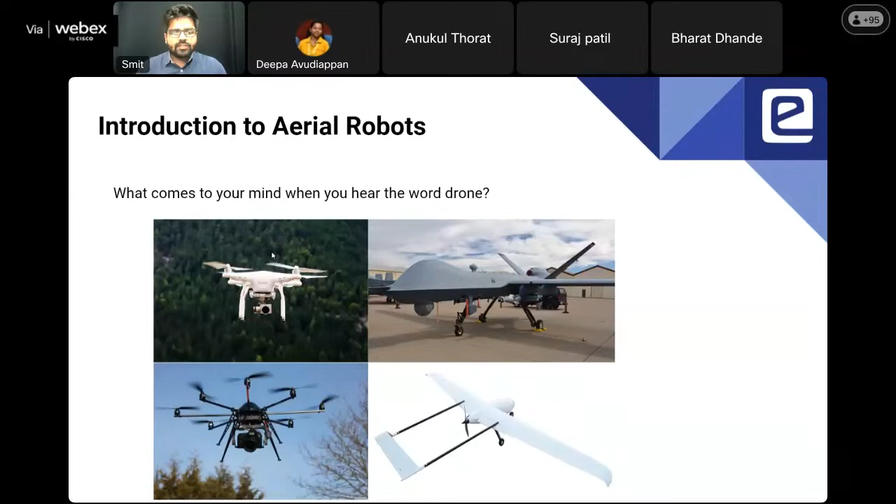Third is not so commonly available picture in your mind when the drone comes, but still some of you might think of this as a drone. But this thing, does anyone think of this when the word drone comes to your mind? No, right? But let me tell you, this also is a drone. So in general, how can we define the word drone? Drone is a pilotless aircraft directed by remote control or nowadays even autonomous. So if you don't have a pilot and it's flying by itself, by a remote or autonomously, it's called a drone.

It might be a ground vehicle, aerial vehicle, or underwater vehicle also. But usually we denote the term drone with aircrafts. So the words drone, aerial robot, aircraft, multi-rotor, quadcopter will be used interchangeably throughout the session, and you can also use those terms. Since we saw these very diverse images of drones, let's classify aerial robots into some brief categories. The first one is the class of multi-rotors.

Now the question is, what is a multi-rotor? If you break the two words, multi and rotors, there are multiple rotors, more than one. They look something like this. Then we have winged aircrafts or aerial robots, which have fixed wings. The difference is, these propellers that you see are also wings, but they rotate at a particular RPM to generate the lift or the thrust.

But here, these wings do not rotate. They are fixed wings. And since they glide in the air with high speeds, they produce lift or thrust. So fixed wings and rotary wings. First is multi-rotors, where you have multiple rotor bodies generating thrust. And the second image that we see is a fixed wing aircraft.

There are some also, if you combine both of them, there's something called a hybrid class of aerial robots, where you have fixed wing as well as a combination of rotary wings. So you can have 3, you can have 2, you can have 4, or even more, as well as fixed wings. So you have advantages and features of both the classes of aerial robots.

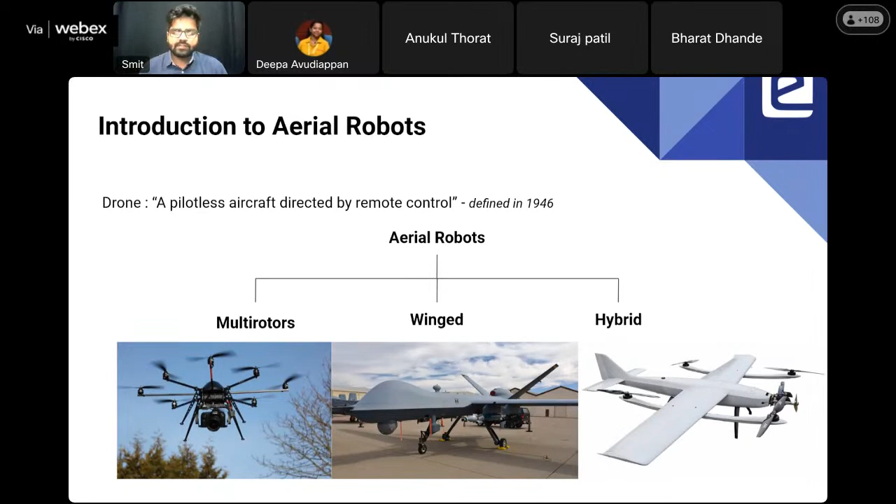So this is how I classify aerial robots briefly. There are multi-rotors, there are winged ones, and then there are hybrid ones. So let's see about the specific class multi-rotors and classify them more in depth. Let's classify them on the basis of the number of rotors that they have. So as we defined, multi-rotors are nothing but a rotorcraft with more than 2 lifting rotors. Out of that, you can have different numbers of rotors, right?

So the first one that is most commonly seen around us is quadcopters. Now, as the name suggests, quad means there are 4 motors, and copters again is a word for a rotating body. So quadcopters, as the name suggests, have four rotors generating lift or thrust, and then there are hexacopters.

Hexa means 6, so I think nothing new. 6 copters, 6 rotors. There can be more. There can be octocopters. This particular aircraft has eight of them, and also you can reduce the numbers and go to bicopters or tricopters. So in bi we have 2, tri we have 3.

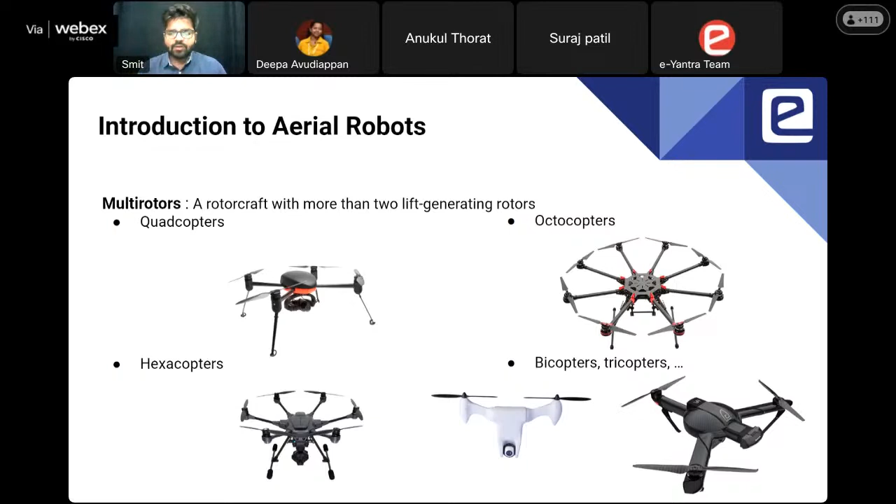So now the question is, why so many variations? Why so many differences? If you can achieve it with, let's say, 4 rotors, why do you want to go to 6? Why do you want to go to 8? Or even go below, having 2 or 3. So the answer is basic. It's just simplicity and the level of complexity involved in all the aspects, in manufacturing, in making, in controls, in software.

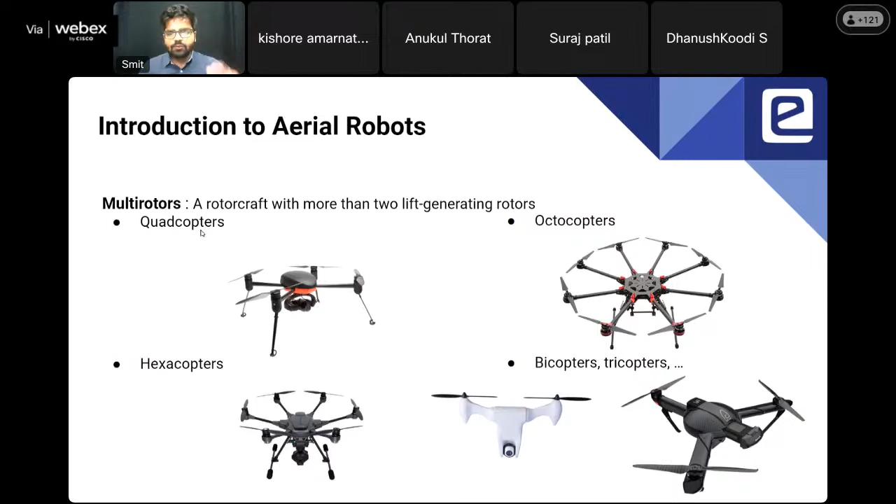So this is a brief introduction about the classification of aerial vehicles, aerial robots. We saw there are rotorcrafts, multi-rotorcrafts, wings, and hybrid. Among the multi-rotors, we have classification by the number of rotors that we have. Okay. So let's now zoom into what quadcopters are and how they work.

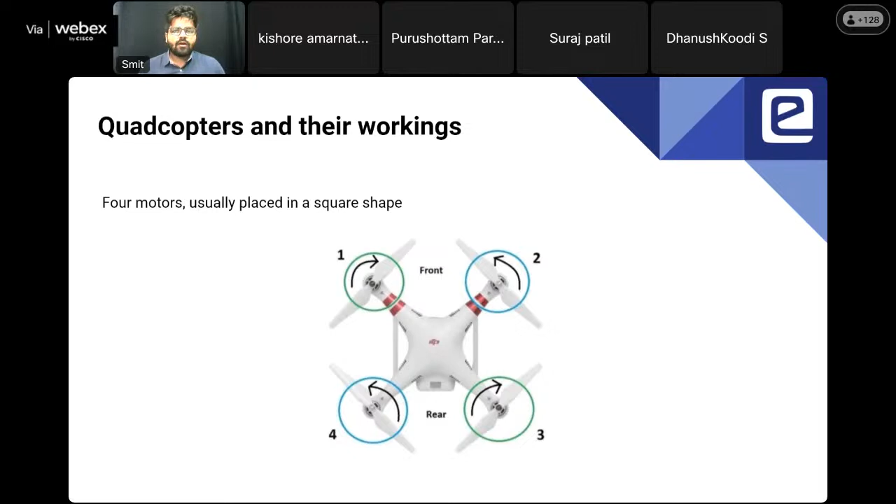That's clear. So in brief, this slide tells us there are 4 motors usually placed in a square, symmetric configuration for simplicity, and they rotate in a particular fashion. 2 of them rotate clockwise and the other two anti-clockwise. So now, we got 4 motors, we connected them. Now how do we fly the quadcopter? How do we achieve motions with the quadcopter? So the second slide is types of motions possible.

Now here we have to remember a basic, unsaid thumb rule of physics. If you have n actuators, you can at max have n independent degrees of freedom. So since we have 4 rotors here, 4 actuators, at max we can have 4 independent degrees of freedom. When I say degree of freedom, it means movement in one axis without changing the movement in other axes. It's not constrained. So if you have 4 actuators, 4 independent degrees of freedom.

And if we decrease the thrust compared to its own weight, it will decelerate. So we can have acceleration and deceleration where we keep the speeds of all 4 rotors the same. Increasing the speed of all 4 will accelerate, decreasing will decelerate. That's one motion found. It doesn't necessarily go up and down, because if it's tilting, the thrust points in a tilted direction, so the acceleration is not purely upwards. So acceleration confirmed. Okay. Now what is roll, pitch, and yaw?

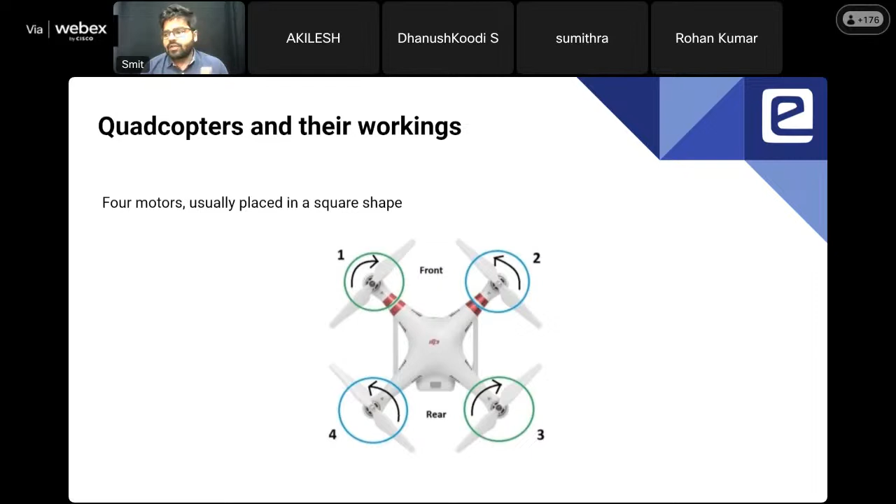Now also, this is a homework to verify that since I mentioned there are 4 independent degrees of freedom, do they have independence over each other? For example, if we have a motion in roll, is it affecting pitch? Question. The motion in pitch, is it affecting roll and yaw? Or even the question is roll, pitch and yaw changing anything on the average acceleration or the thrust? So if we want to change a particular axis,

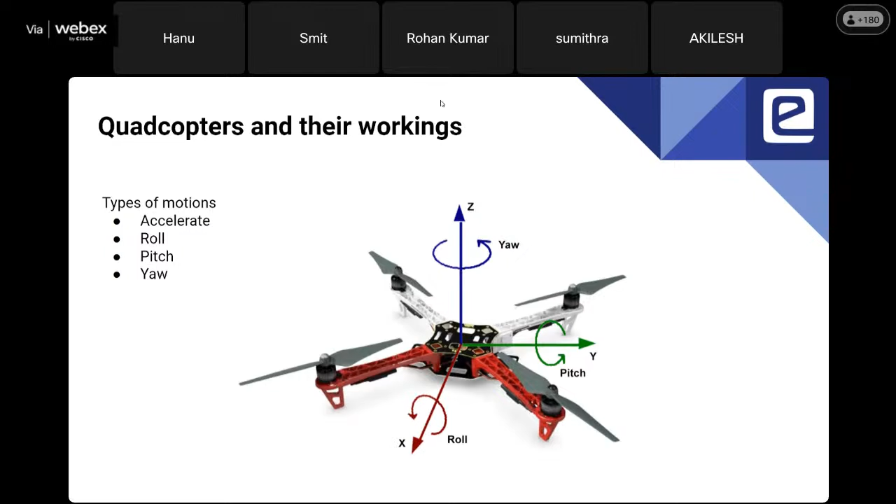Okay, I'll continue. Yeah. So the point I was making is, we should check the independence, right? Since I mentioned it's independent, if I do a roll, it should not change anything in the pitch or in the yaw or in the acceleration axis. Similarly for all of them, if I just want to accelerate, the pairing that I did should not change anything in the pitch, roll or yaw axis.

So the homework is to think about the motions that we defined, the combinations that we defined for the rotors: do they have any effect on the other axis while moving one axis? Is it changing the other axis or not? So that's how you can verify the independence of degrees of motion.

Now, one more question that comes to mind. Okay, we saw angular motions. We can do roll, pitch, and yaw. That's fine. But we don't want those in real life, right? We want the drone to move fast in the front axis, in the back. It should go front, it should go right, left, and it should go up and down. So it does, right? We have seen drones do that. So how do they do that? Since it's not mentioned here,

Priyanka is asking what homework. Homework is just after the session, verify the independence of these four axes. When I say independence, I mean if you want to change the roll angle, the motions that you are doing, pairing the two motors, is it changing the pitch angle or not? Similarly, is it changing the yaw axis or not? If it's independent, it should not have any effect. When you want to just roll, it should not have any effect on pitch or yaw or even the acceleration. So that's how you will want to verify the independence of all the 4 degrees.

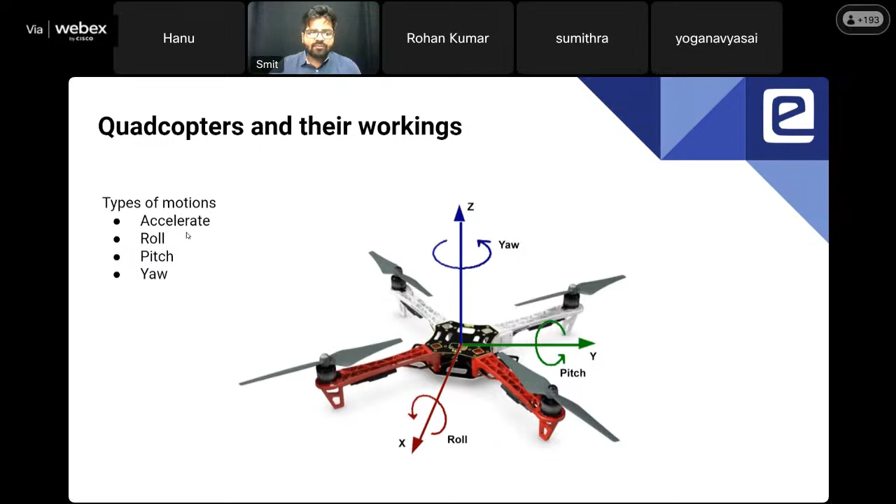So X, Y are nothing but the same thing as roll and pitch. So even though we have 6 degrees of freedom, it can move in the front direction, but not independently. That's why the types of motions are just 4 independent motions.

Now, we saw how it is functioning and how we have the motions, but the question is, how does one make a quadcopter, or what it takes to make a quadcopter? So we will list down the components first, and then we will see them one by one in detail. Okay, so that's the list of what anyone needs as the bare bone essential parts to make a quadcopter.

First thing is definitely a chassis, a frame, a structure that holds everything. Second thing is the thing that generates the thrust, generates the lift, makes it go up, down, or do the motions. So propellers. To rotate the propellers, we need motors. To drive the motors, we cannot just connect the motors to our batteries. People who already have interfaced with motors know that you cannot directly connect to the batteries because we want to have a changing speed, right? So there are motor drivers that drive the motor.

Then there is a flight controller, that is like an intelligent computer that does some complex calculations, has an algorithm running, and directs what to do, when to do. It controls the flight. If you want to fly it as a manually piloted aircraft, as a pilot, you have to have a remote control system between your drone and the pilot. Then something which is a GNSS receiver.

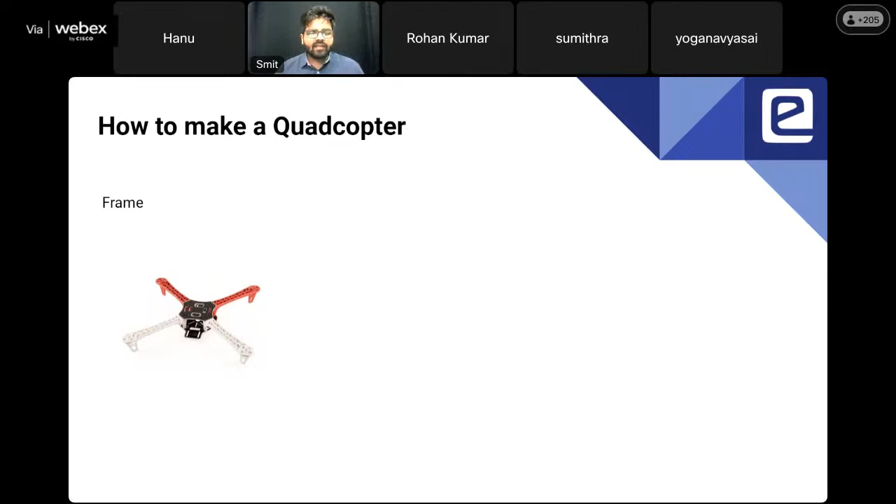Frames. So you can either make your own, maybe inspired by diagrams or structures, or else you can just grab it from your market or online stores. They come in different sizes and formats. The first one you see is a plastic frame, generically available in India on different online stores. This one is a little more on the premium side. It has plastic plus carbon fiber, and a nice landing gear. Or this one is purely made of carbon fiber. It has more strength, it is not bendable.

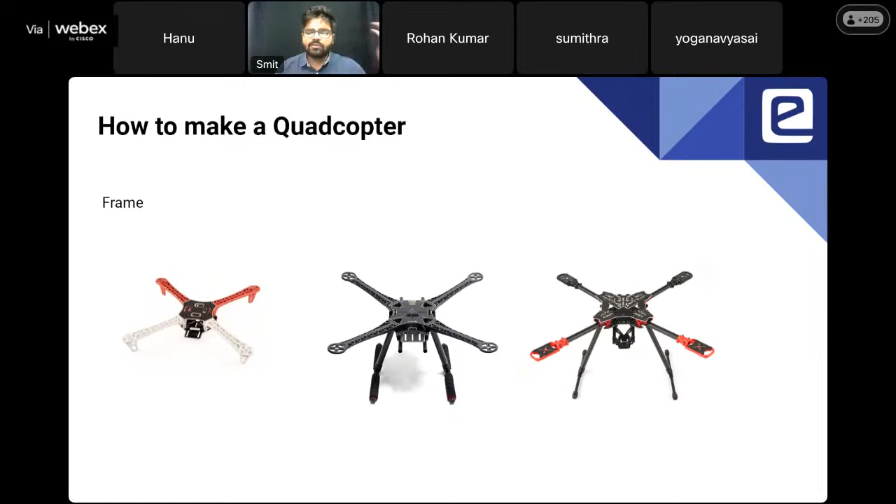So this is, and obviously sizes can increase from smaller to bigger ones. So you have to choose which size you want to make your quadcopter. Either make your own frame or get it assembled from the market. You can have different materials, plastic, carbon fiber. You can also make it from metal or wood if the weight permits.

We have all seen, right? Our two-blade fan is producing less airflow compared to a three-blade fan. And a four-blade fan has more airflow compared to a three-blade fan, right? We have seen it all in our houses. So with the same size and same rotation speed, the more the number of blades, the more the thrust.

But then the question is, if you have a four-blade propeller, why do you want to use a two-blade or a three-blade? The answer is sometimes you don't want that much power. Sometimes you don't want that much agility. Or if you increase the number of blades, the efficiency decreases. It will take more power to generate thrust, and that's not efficient. So in different applications, you will choose different ones.

In efficient and longer duration ones, not so heavy payload ones, you will choose a two-blade propeller. But if you want a very fast, very quick, very agile drone and to lift a heavy payload, but you don't care about efficiency, you can do a three-blade or a four-blade.

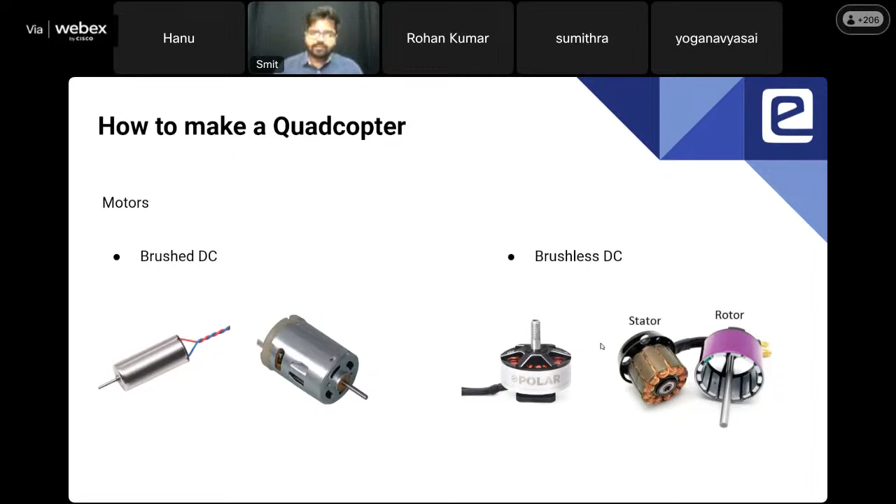So these three wires go inside the motor, and finally you can have an interface that connects to the motor, and you can have RPM control or speed control over the motor. So we saw motors, brushed and brushless, and we saw the drivers for both.

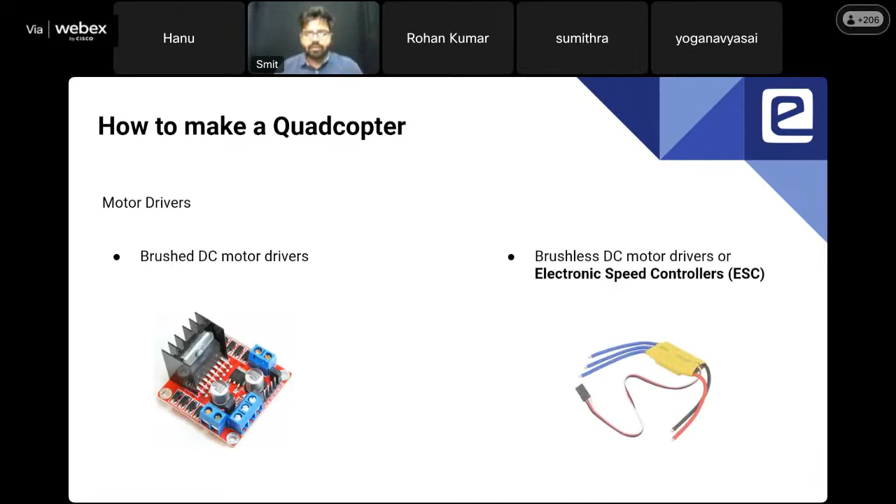Now next thing is flight controller. So I'll define the flight controller as a computer capable of running complex algorithms which controls the aircraft.

Okay. The flight controller is a computer that just runs complex algorithms which controls the aircraft, as we saw. Let's see what are the options possible. Some of you might have seen or heard about these ones. The first one is a Pixhawk. I think some of you might have heard already. This is an ArduPilot board, or previously known as the APM board, APM flight controller.

This third image, black color image, is more of a less complex version of the flight controller. It's smaller in version, it has less features, but still a flight controller. Also used in some DIY applications. Also, the cost is less, so people can easily afford it if you want to make a low cost aircraft.

And finally, I have shown an Arduino also, which is not actually a flight controller, but you can make it a flight controller. If you want to build your own one, take an Arduino, write an algorithm inside that, have the sensors interfaced, and that's a flight controller. Because all of these are nothing but some microcontrollers interfaced with some sensors and running some code, the firmwares.

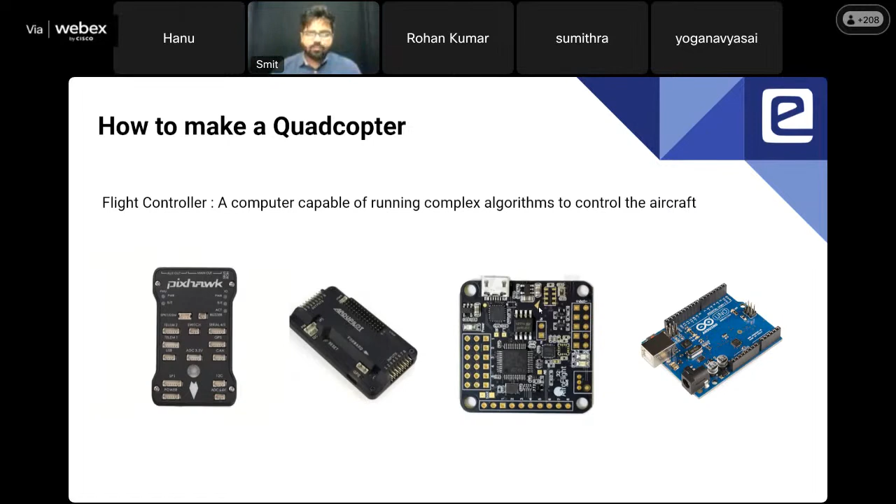So these can be chosen as the flight controller depending on the application. So Pixhawk, first and second one, are more towards the autopilot side. The third one is more towards the manual side, and fourth one is complete DIY side.

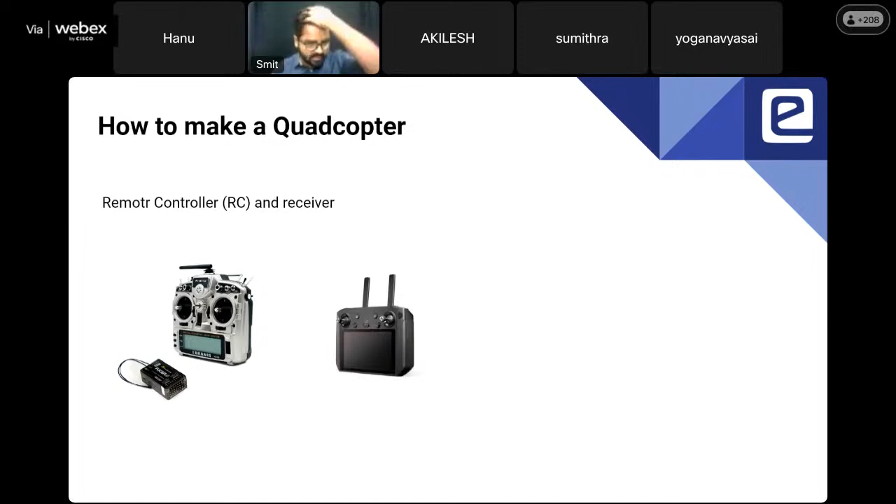Or alternatively, you can just skip all of them and have a mobile application. So somehow if you can connect your mobile phone to the quadcopter either by Bluetooth or Wi-Fi or by internet, and you have an app here that's just like a gaming controller, then that's a remote controller.

So if you see, there are two kinds of joysticks here. You also have two joysticks here. You have different buttons, different sliders, different toggle switches. You also have different buttons, sliders, and toggle switches. So it's like a software version of the remote control.

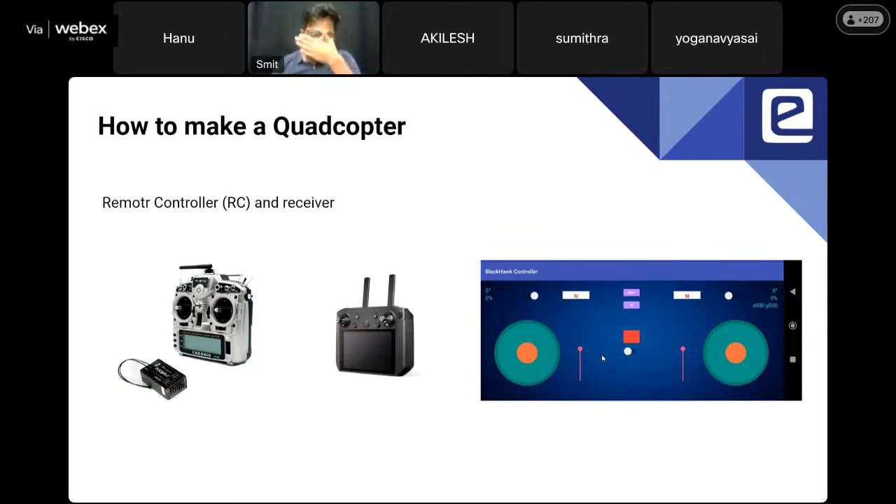This is what we had built here in eYantra. In fact, our interns had built this as a part of the summer internship program. So these are the kinds of things that we do or develop here. So you can have these kinds of apps, have them connected to your quadcopter in any manner you like, Bluetooth, Wi-Fi, or even internet, and control the drone or quadcopter.

Okay, done. Now what? Now the drone has to have some sensors, right? Sensors to know its position in real time, know its own orientation in real time. So as I mentioned, Global Navigation Satellite System, GNSS, in general known as GPS, but GPS is a specific GNSS of the USA. So that's a receiver that we need for the quadcopter to know its own position in the real world.

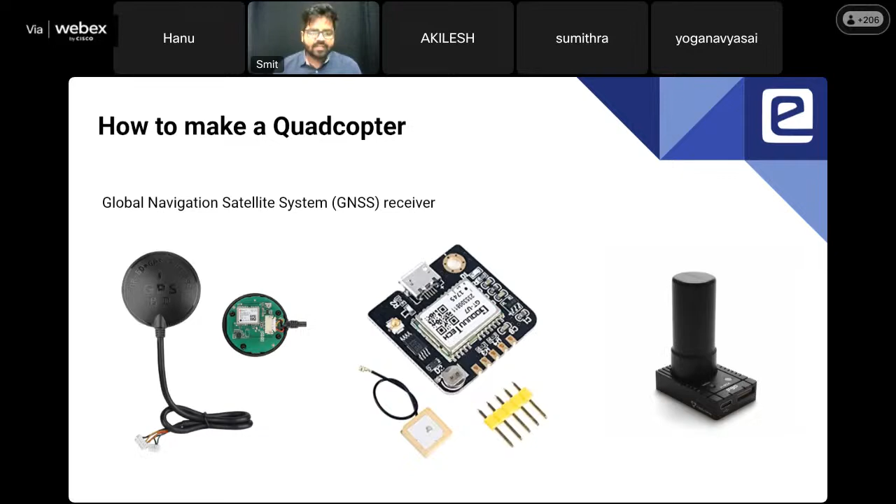They look something like this. They also come in very small form factors like these, or can be advanced. So the last one is a more complex and expensive model of a GPS or GNSS receiver that gives you more accuracy. So you have these different kinds. You can just go onto the online stores and check what kind of options are available for you.

Batteries. Since power is needed to fly or to run all the applications or the peripherals, we need power supplies.

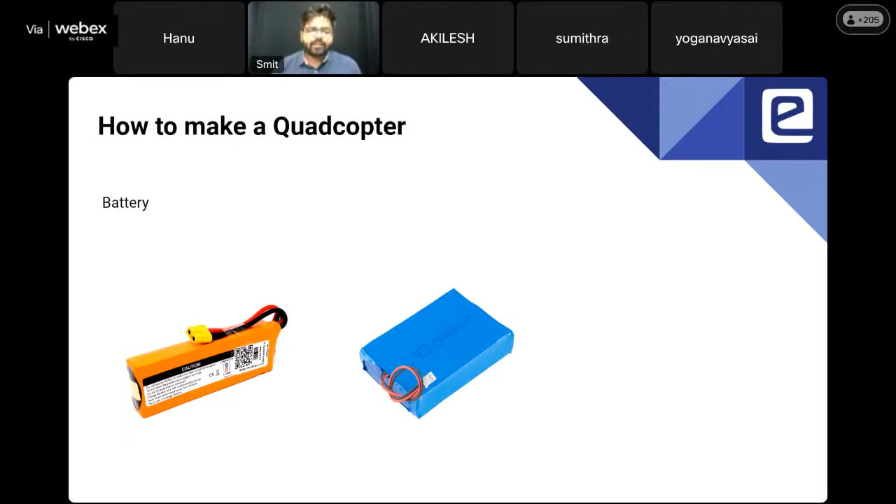So this first option is a lithium polymer battery. We have all heard about lithium polymer batteries, usually found in power banks, laptops, electronics like mobile phones, or even watches. Lithium ion batteries: little difference between polymer and ion battery. Usually the lithium polymer batteries come in higher power delivery capacity, and these are more of long-running batteries. Lithium ion, lithium polymer, and the final ones are like normal cells that we use but rechargeable.

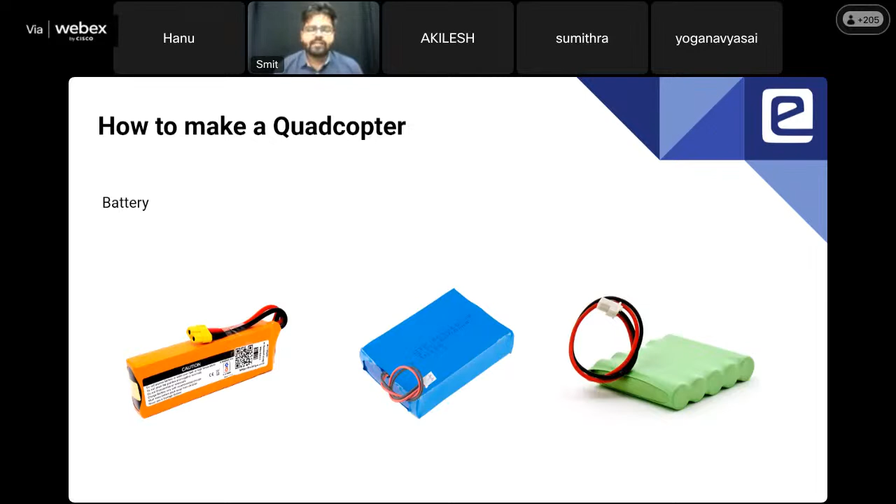Nickel metal hydride is the one. The chemical composition is nickel metal hydride. So lithium polymer, lithium ion, nickel metal hydride, depending on your application, you can choose any of them. But usually 90% of the cases use lithium polymer batteries for quadcopters or drones because they need high discharge rate capacity.

We saw the hardware components required. Okay, that makes it. We have a frame, we got propellers, we attach it to our motors. For the motors, we got drivers. For the drivers to communicate, we got a flight controller. And also we got a receiver for the flight controller to know where the drone is right now. Also, we added the battery as a hardware component. Done. Makes the complete system ready.

But what about the software? That completes the hardware aspects, but software aspects are still missing, right? You need a software or a firmware that actually runs inside the flight controller.

Just a second, I can still hear a lot of noises in the background.

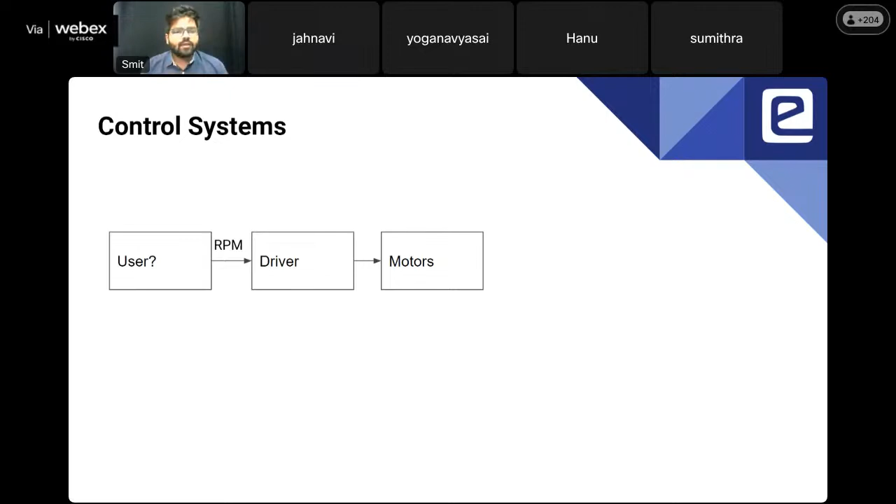Can the user in real time have so much complex inputs going to the drivers? No, is the answer. So what we do is, before the user and the RPM, we place a smart guy that can do all these complex things for us.

And instead of RPM from the user, we can directly say, okay, I want this angle to be attained. I want 2 degrees pitch. I want 5 degrees roll. I want the drone to face at 110 degrees north, or in that manner.

So user can give angles, and the controller, the smart guy, can think, okay, if you want to move in this particular axis, these are the two rotors that have to be faster or slower. If you want to have an acceleration, all four have to be faster or slower. So there is math, there are equations going around, calculating everything, and then finally giving the RPM to the driver.

So we place the controller in between the user and the driver. So user gives the angle, the controller finally calculates the RPM and gives it to the driver. But the question is how? How is this so smart?

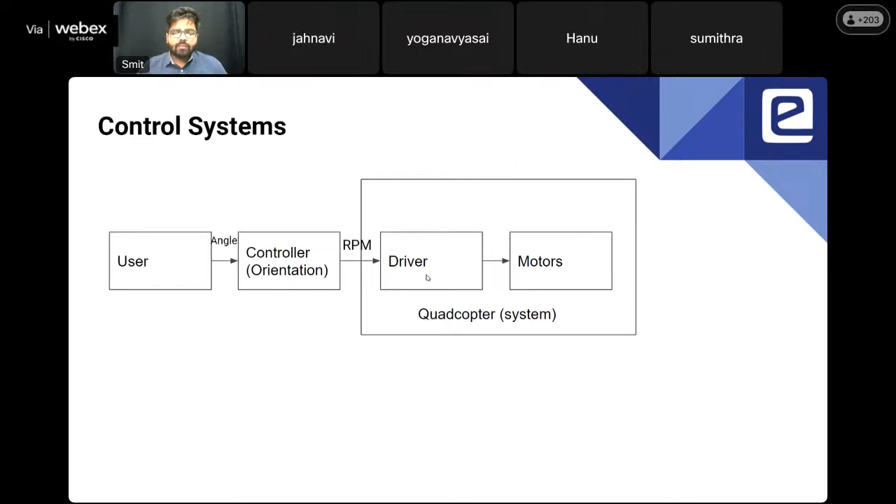The answer is, if we just place a bounding box around the driver and motor combined, we have the quadcopter system. We need sensors. If we have sensors telling the controller, let's say my goal is to have a 1 degree pitch, 1 degree in the pitch axis. But right now the quadcopter is at 0 degrees, leveled perfectly.

If the sensor can say, okay, you are at 0 degrees, there is a 1 degree error or a deviation from where you want to be, then the controller can know, I am in this direction, 0 degree direction, I want to rotate in the downwards direction. That is why I can decrease the speed of front two motors and increase the speed of back two motors.

Similarly, if I have the requirement of moving in the upward direction, which is, let's say, -1 degrees, then the sensor will report, okay, you are at 0, the user gives the angle command as -1 degrees. It will calculate the error and finally decide, I want to increase the speed of front two motors, and then finally rotate and have the angle achieved.

So that is how, with the help of sensors, with the help of what we call a feedback: the quadcopter system does a rotation. That rotation can be read by the sensors and fed back to the controller. So it can check in real time if it has reached the particular angle or not, and decide what to do based on the current sensor reading. So this is how, using the feedback or the sensor input, the controller can be smart enough to convert our angle inputs to the final RPM inputs.

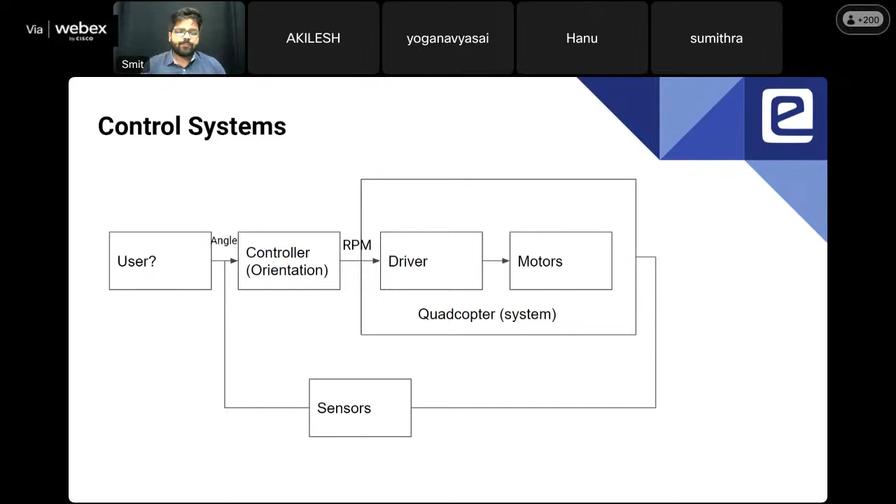If I want to move 1 meter away in the x-axis, x-axis corresponds to roll. Now I want to do a roll action, but how much roll action? What is the angle that I should keep so that the drone moves at a particular speed and then comes to 1 meter, stops and hovers there? Controlling that is possible, but requires piloting skills. So it's still not feasible to put the user directly on the angle control.

That is why we usually have one more controller. This controller is called a position controller. What it does is take the commands as position inputs from the user. If you want to be at an x, y, z coordinate, that is the input from the user, and the position controller will calculate.

If you want to move in x-axis, we will do a roll angle. If you want to move in z-axis, we will do an acceleration maneuver. So that's again a little smarter for us. The controller is a little smarter. How, is the question? Same answer: sensors.

Sensors feed back the current position of the drone, and with respect to the current position, it can think: okay, if I am at 0 and I want to move to 1, I have to do a roll, and as soon as it's moving, its current position changes. The sensor updates its position, and as soon as it has reached 1 meter or wherever the coordinate is, it will say, okay, I have to stop the rolling now. I will just output the angle as 0-degree roll, 0-degree pitch, and that's how the chain is complete.

User gives position commands, the position controller decides what angle maneuver is to be done. Based on the angle maneuver, the RPMs of the 4 motors are decided by the orientation controller and then fed to the driver and the motors. So that completes our control system. This is where we started with the uncontrolled system, and the user now is dealing with a controlled system. This is usually the architecture that we find.

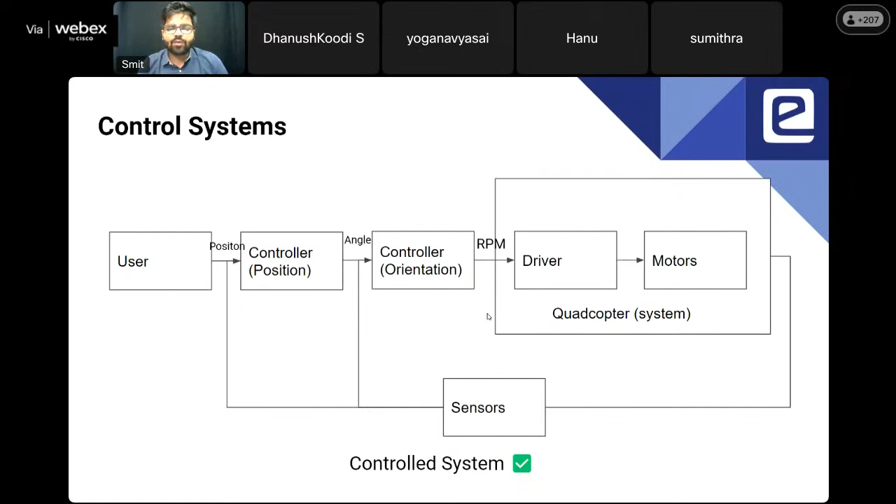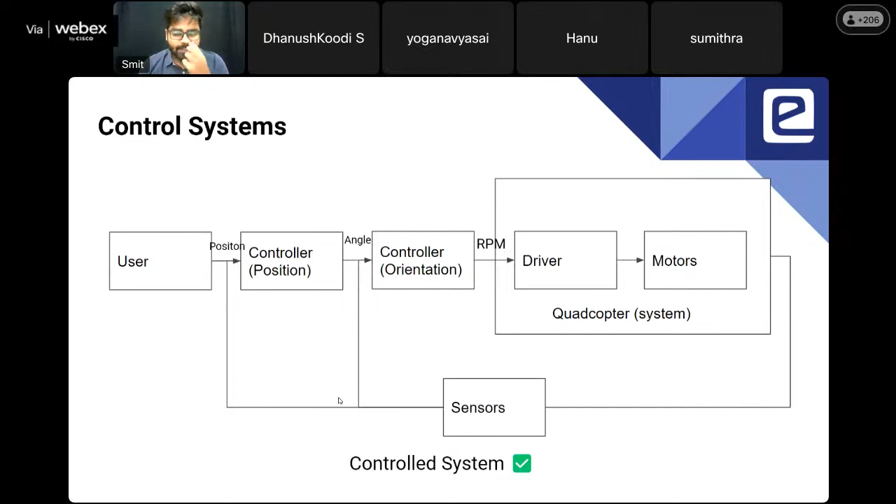A gyroscope gives you the angular rotation speed, and an accelerometer gives you linear acceleration. I'll not go into depth on gyro and accelerometer, but what I can say is the gyroscope and accelerometer combine to form what is called an inertial measurement unit, or IMU. You might have heard this term somewhere. We all have IMUs in our phones, in our tablets, sometimes in our laptops also.

That's how it can smartly detect if you have rotated the screen to a particular angle, and then it switches to landscape mode. Even for racing games or other games, you might have used the function of the IMU that detects the angle of your mobile phone. So the sensor that can read the angle of a particular body is the IMU, and that is what we use as feedback for the orientation controller. Done.

But how about the next controller? Can the IMU be enough for our position controller? The thumb rule says whatever is the input for the controller, the feedback has to be the same, apples to apples comparison, right? We cannot have a position input and read back the angle from the IMU. There's a mismatch. For the orientation controller, it's angle versus angle. For the position controller, we have position as input from the user. If you want to move in x, y, z coordinates, you have to have the same units of feedback. So what kind of position sensors do we have? We have gone through it in the slides.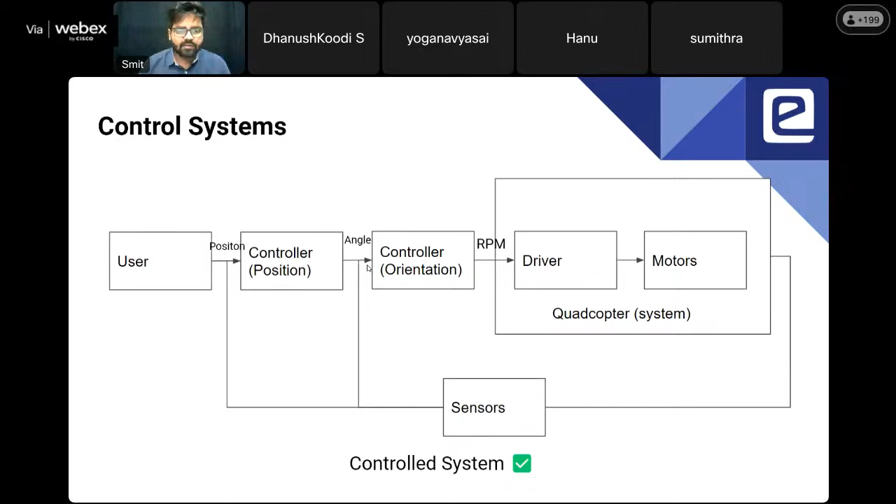Let's see more of a higher level plan. So, okay, done. You have angle control done, you have position control done, hovering can be done. But what if I don't want such minute controls? All I want the drone or the quadcopter to do is fly around, do a job for me, complete the mission and come back and land autonomously. So that is what high level planning is.

From the user, I just give higher level commands: just go around at a particular height, take a photograph, and come back. That's it. I don't care what angles you fly at, what speed you fly at, or what coordinates you are moving around. So that's what the higher level planning is usually. If you're not interested in those minute things, you will choose the autopilot or autonomous system.

So this is an example from the Mission Planner software, and inside that, if you can see the interface, this is kind of a planning for a mission. You have some green color waypoints that are numbered 1, 2, 3, 4, 5. So basically just drawing a path for the quadcopter or the drone. And then finally you have defined a home position also.

And if you look carefully, there are latitudes, longitudes, like positions are given, even the altitude is given. So the altitude is 100 meters here. So the mission in general says, okay, go to waypoint number 1, number 2, number 3, followed by 4 and 5 at 100-meter altitude, complete the flight, and then land back at the home position. So that's kind of a mission you can plan.

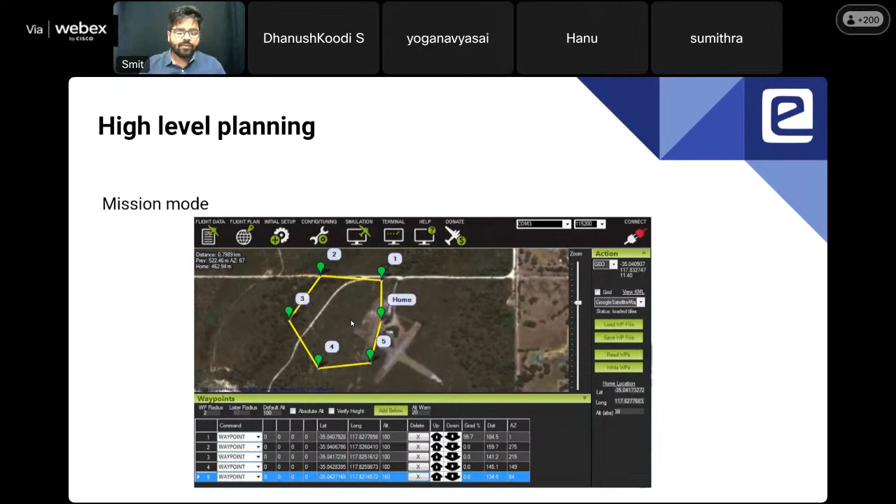We can classify these mission plannings or high level plannings again in two modes. Autonomous modes can be in a known environment or an unknown environment. For example, here it's a known environment. You have the map. You are saying, okay, you have to go here at this particular point, latitude and longitude, at this particular height. So the environment is known, and sometimes the environment can be unknown.

So if you have more advanced missions, for example, just go and survey a particular area. I don't know how the area looks like. I don't know what disaster has happened at a particular area. If a building has collapsed, there's a volcano, there's an earthquake, tsunami. I don't know what the coordinates are. Maybe an unknown environment, and just discover and wander and then come back. And others can be known environments.

So path planning, I'll just classify. If there's a known environment and you have to have a planned path from the quadcopter side, you use some kind of algorithms called A star, Dijkstra, or RRT algorithm, rapidly exploring random trees.

Or if it's unknown environments, and if you still want the autonomous mission, the first thing is having obstacle avoidance, right? How does the quadcopter know if there's a tree or a building or a big obstacle that it cannot go inside? So there are bug algorithms, bug 0, bug 1, bug 2. Also, there are VFH algorithms. These are specific algorithms for avoiding obstacles. So if you just note down these algorithms and you are interested, you can search on the internet what these are and how they function. So this is more of a brief about how autonomous flights look like.

Now, finally, let's have the last part of the session, which is applications. Nothing new. I'll just touch everything from the surface. The usual application that we see is delivery. Definitely, we have all imagined our future with the quadcopters delivering our parcels in real time, flying around and carrying parcels, right? Agriculture. Today, it's being used.

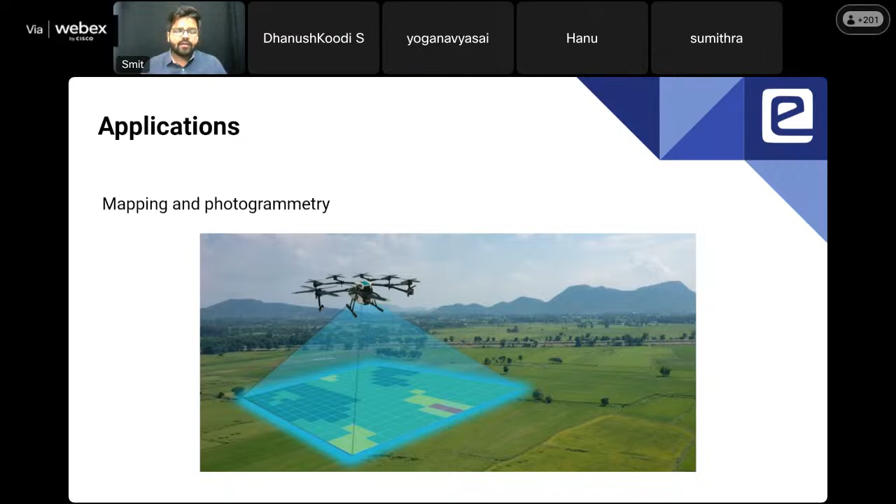The applications can be found in mapping and photogrammetry. If you want to map a particular piece of land, if you want to see what is the level of land at what position, so basically an entire map of the land, or even have a 3D model made of the entire structure, that is called photogrammetry. So you can have, okay, this is the size of the tree, this is the mountain, this is the rock. That way you can have a 3D reconstruction of the areas. So you can use your quadcopters and drones for this application.

The most commonly used commercially available application is aerial cinematography and photography. This is where weddings, concerts, or even photography and cinematography in scenic environments is done using quadcopters and drones. So that's the most commonly available form of a drone you can buy right off Amazon, with a camera facing in front, and you can have shots taken from the aerial view. But a not so commonly known application for drones these days is something called a first person view drone. Now, what is a first person view drone? The short form for that is FPV.